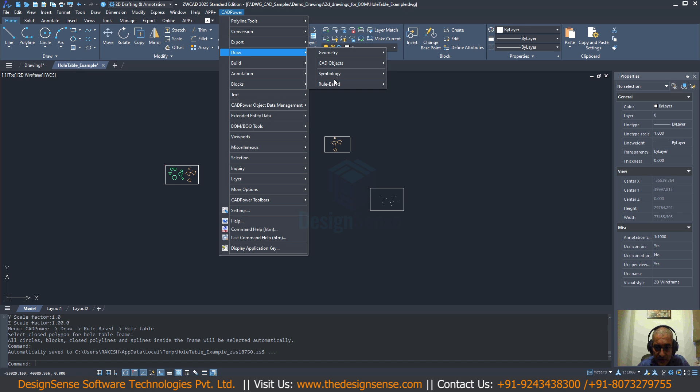So let me start with the hole table command. In CAD Power, we have a command in the draw section under the rule-based subheading. It's called draw hole table. You can run this command from the command line also by typing cp_holetable. This command requires a closed polygon as a hole table frame. So let me start with this closed frame here, which contains a number of circles and some polygons as well.

So I'm going to select this frame, and you get the hole table menu. Now in this hole table menu, there are a couple of things that you need to know. The first one is the export file. The hole table information is exported as a CSV file so that it can be easily imported into Excel.

There's also an export format which by default is CSV, and there are two other sub formats for manufacturing, milling XY and Siemens subprogram. We have designed this program to be open so that if you have a specific machine which requires a special format, you can tell us the details of that format and we will be happy to incorporate that into this command. So it's something like a post processor which creates customized output formats.

The next important parameter is the dimensioning method, and now I'm going to select linear from origin. Draw center marks is on. Create dimension line extension from center of hole, I'm going to leave this switched off. The initial dimension distance and the next dimension distance determine the distance from the edge of the frame where the dimensions should be drawn. I'm leaving it at 75 and 90 based on measurements which I've already done.

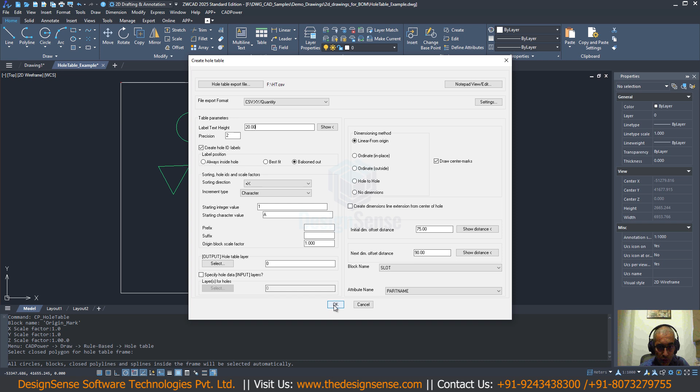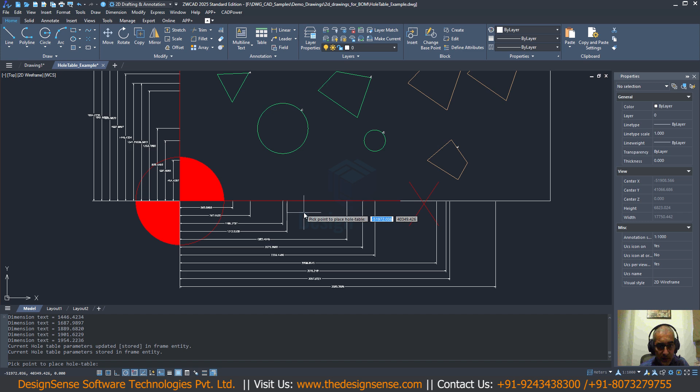Pick origin point. By default it is the lower left corner of the frame, which is marked with a red circle here. So I just enter. Pick a point on the x-axis of the hole table. I'm going to pick this end point here. You can see that already the dimensions have been created, which are linear from origin. The hole annotations have also been drawn like A, B, C, D, as we specified.

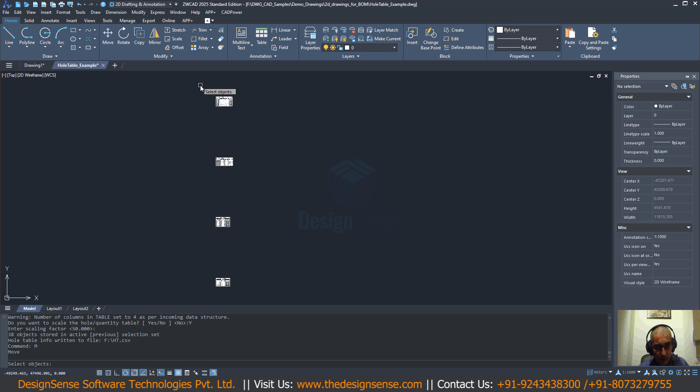Now it's asking for the hole table position. I'm going to pick this point here. Do you want to scale? I'll say yes, and I want to scale by 50. That's fine. So I get these 4 hole tables here. Let me just adjust it so that they are next to each other.

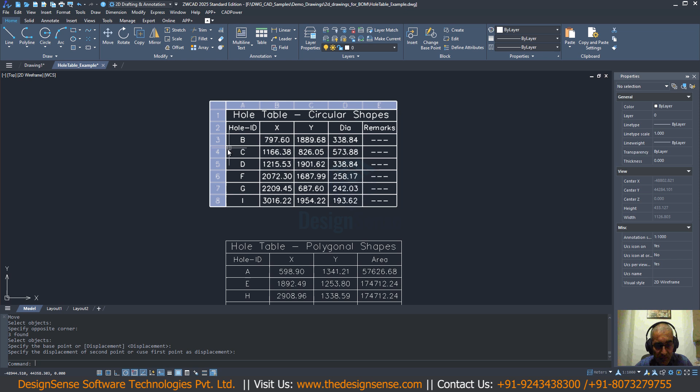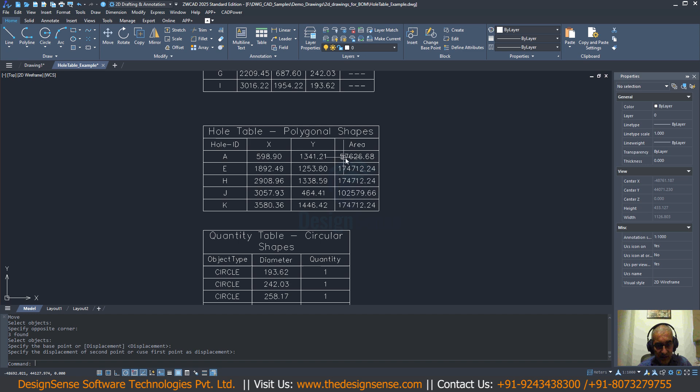So if you look at these hole tables created here, the first one is a table which contains the circular shapes. It tells you which hole IDs represent circular shapes, their X and Y coordinates and the diameter. Then there is a polygonal shapes table which gives you the polygonal area and the centroidal dimensions and also which holes fall into that. Then there is a quantity table.

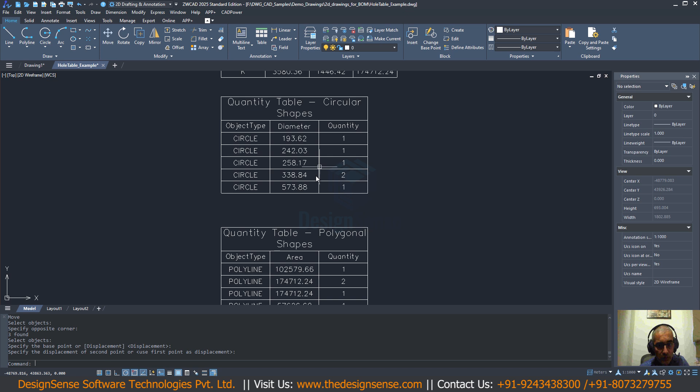The quantity table tells you how many circles of a particular diameter, and similarly the quantity table for polygonal shapes tells you how many polylines with a certain area are present in this frame. Now if you look at the folder, this is the file it has created, ht.csv.

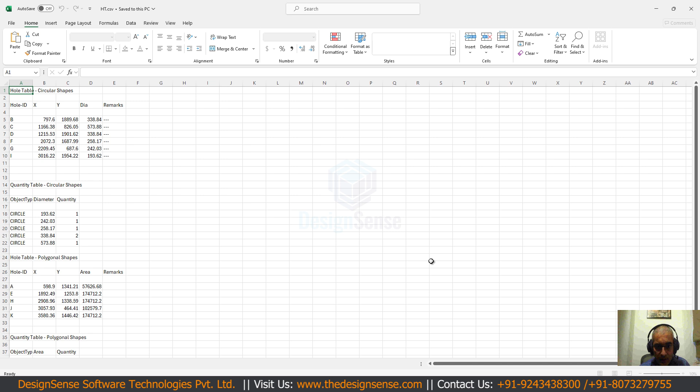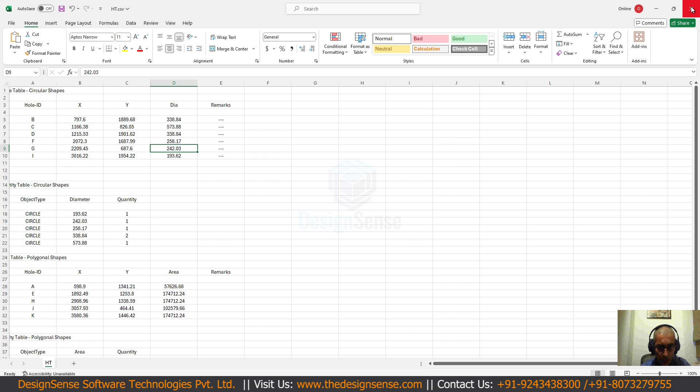So you can see that the hole table has been exported as an Excel CSV file as well. So it makes it easy for you to export your data into CSV or visualize it inside your drawing as a CAD table. So most of the CADPower commands are designed to export their data in CSV format so that it makes it easy for you to work with Excel.

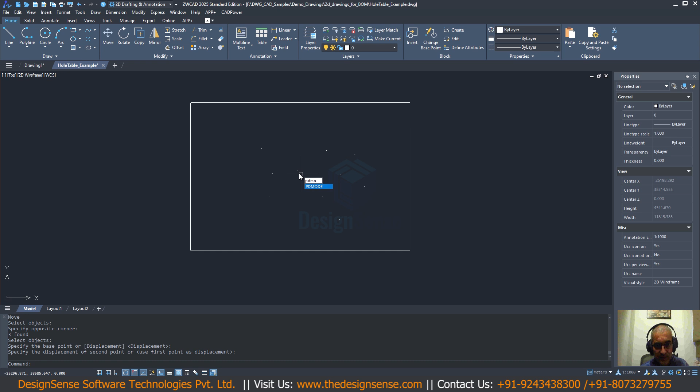Now let us look at a different way of creating this hole chart. Now, not always you will have circles and polygons. Sometimes you may just have points. So for example, this is a frame with some points on it, and you want to create a reference table or a hole chart for it. So we classify even this kind of data into a hole chart category. So we can go here to hole table, select this.

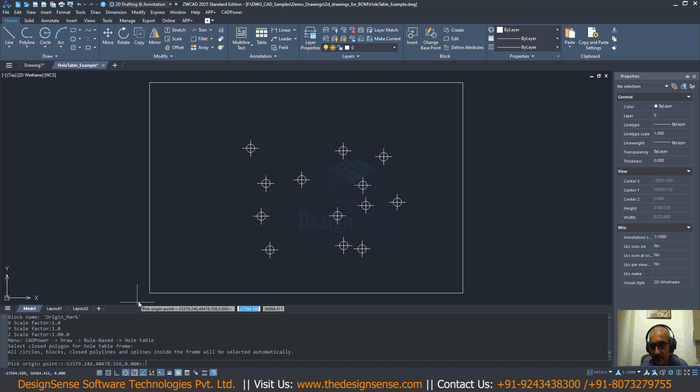Now there are some existing annotations from a previous run, so I'm just going to delete it and leave all this as it is. So instead of linear, I'm just going to change the dimensioning method as ordinate in place, and let's see what happens now. So origin point is this one, and the point on the X axis is this one. So pick point to place hole table. So I'm going to pick a point here. We want to scale it, yes.

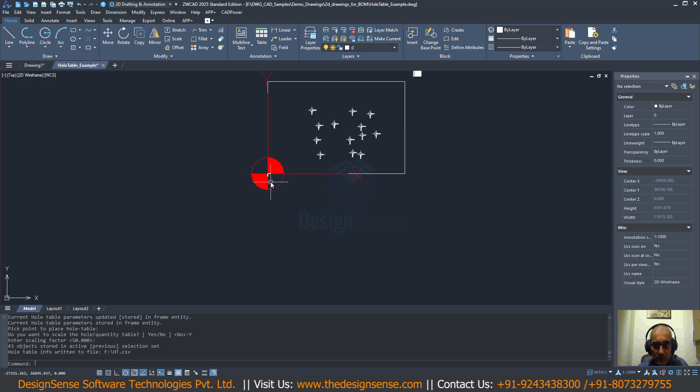Scale factor is 50. So you can see that next to the hole, now there is an X and Y dimension, and that is measured from the origin here. Now the origin block is a little too big. That is because probably the insertion units are not correct, but it's simple. You can just select this block and change the X and Y scale factors, and it's going to come to the size that you are comfortable with.

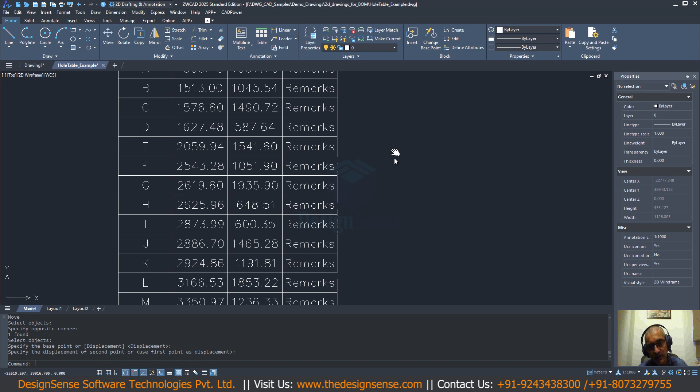So if I come back here and open this, you can see there's a hole table of points, and these are the hole IDs, these are the XY, and the remarks are mentioned just as remarks. You can edit it because this is a normal table. Now the same information is once again in Excel as well. So like I said, all data from CADPower, to the extent possible, is saved as Excel format.

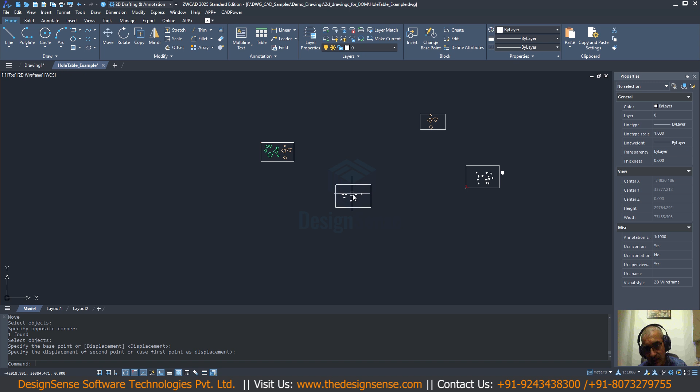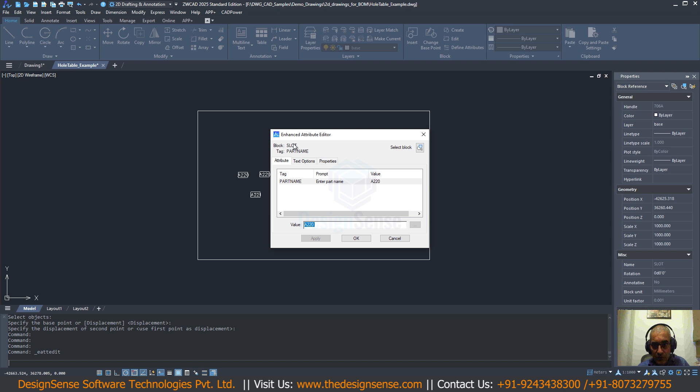Now in some cases we have observed people having blocks as part of their hole table information. They use blocks with attributes because it is sometimes important to display the attribute value in the hole table. So for example, we have a block here called slot, and there is an attribute called part name, and it has different attributes like A220, 221, 222, and so on, and it is all inside a hole frame. So this can also be a candidate for the hole table computation.

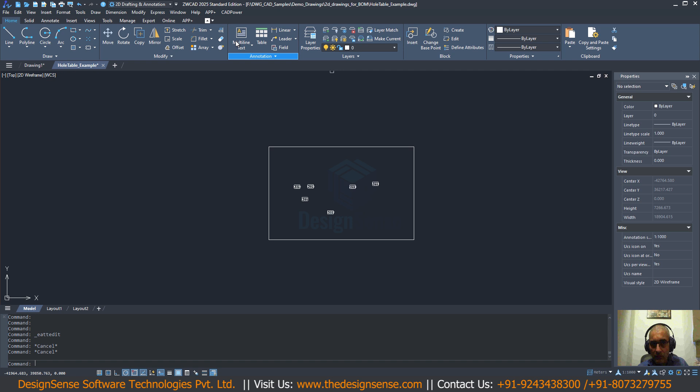By the way, it's also available in the ribbon. So if you go to the CAD Power ribbon, you can get the hole table command here. So I will show that to you in a bit. So first let us just do it this way. So when you use blocks and attributes, make sure to select your block and select your attribute name, and then that's the origin, and this is the x-axis point.

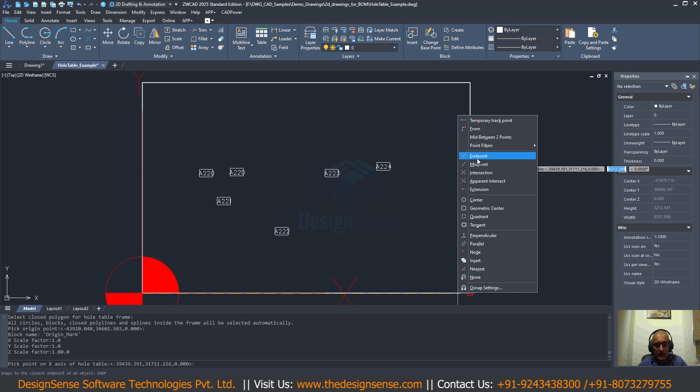So you can see here the quantity table for blocks. Block attributes are now shown with their values and their quantity. So how many times each block attribute is repeating, that is shown here in the quantity. So that's how the hole table works in ZWCAD 2025.